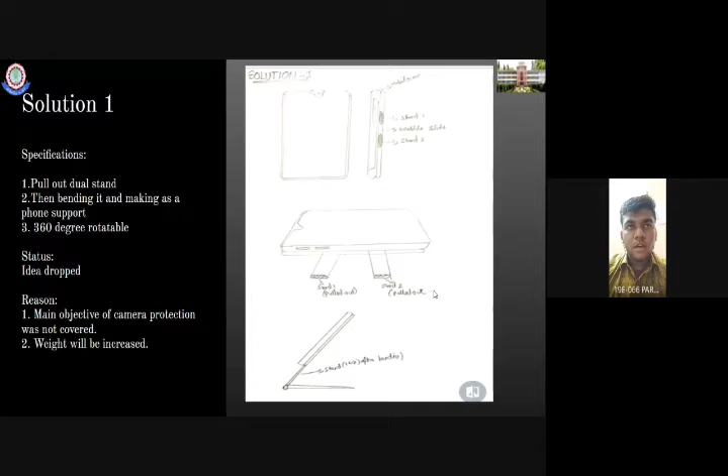The reason is the main objective of the project is to protect the camera, but that is not covered in this solution, and also the weight of the case would increase. Hence we drop this possible solution and skip to the next.

Solution 2 contains an adjustable rigid stand. It also protects the camera by a slider type of shield, and it is a holdable case while taking pictures.

But the status of this idea is also dropped due to some other reasons. The reason is there is a patent for this type of sliding camera protector, so we can't proceed with this further. Also, the stand will not be rigid for the respective position.

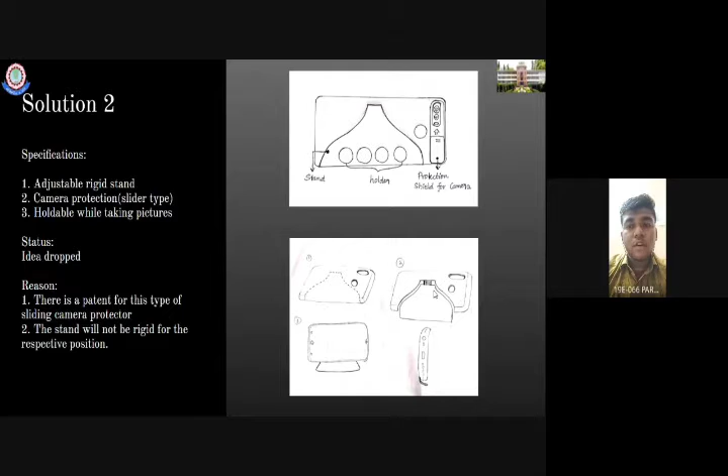You may see that in the image too, the stand is like that, so we can't believe the stand will hold for some other respective positions, and it will fail sometimes.

So we skip to possible solution 3, which contains an adjustable rigid stand, with camera protection achieved through the design. So protecting the camera is covered by overcoming it through the design, and the third feature is that it's holdable while taking pictures.

The status of this idea was taken, and it is the idea which we formulated into a prototype. The reason we took this idea is that heat issues can be overcome by this prototype, and the cost can be reduced compared to solution 1 and solution 2. The stand will be almost rigid, more than solution 2, for the respective position, and it is also adjustable. So we took solution 3 for our prototype design.

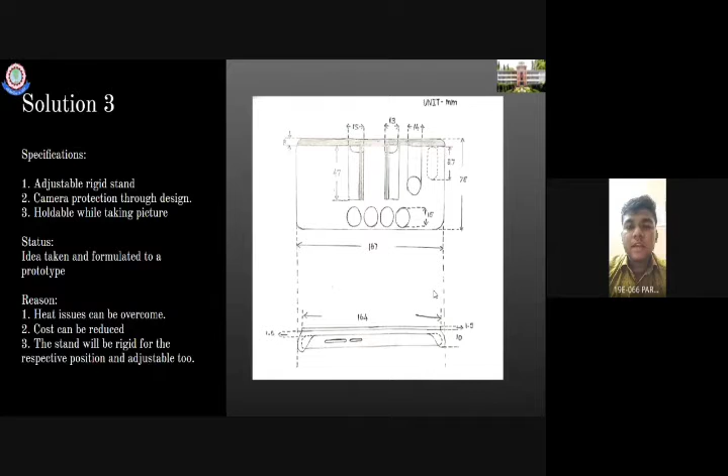Thank you, Parsuram. I am J. Manoj Kumar, 19E051. Here I am going to present the objectives of our prototype.

The figure beside is our prototype. This covers the following objectives of our project: camera protection, rigid stand, comfortable holder while taking pictures, solving heat issues, and dust and stain free. We will see one by one how these objectives are covered by our prototype in the upcoming slides. First, camera protection.

You can see that the camera is completely protected when the stand is in closed condition. Also, the camera is protected even when the stand is coming out, because the camera is slightly elevated from the stand if it falls unfortunately.

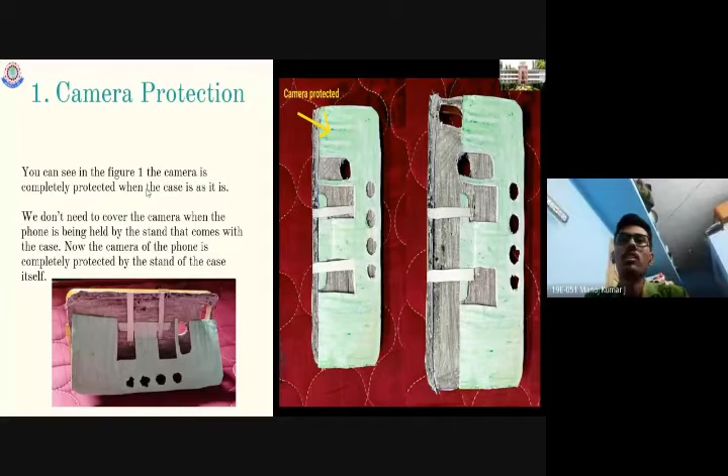Next is the rigid stand. That's a segment at the back of our case that protects the camera as well as acting as a stand. Since it is made from hard plastic, we can use it for a long time. There is an adjustable segment between the two strips, so we can adjust the stand as per our requirement, changing the angle of the phone.

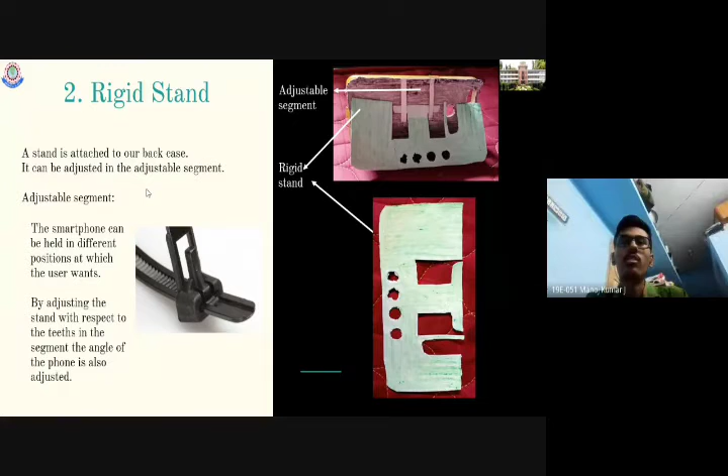Next, comfortable holder. There are 4 holes in our back case which help you hold the phone while taking photos, videos, or selfies.

Next, solving heat issues and dust and stain free. Here we use a layer of silk between the foam and the silicone case so that the silk absorbs the heat, so we can't feel the heat in our hand. Also, the stain in the case is due to the heating effect of the foam. The silk is in between the foam and the silicone case, therefore there is no color change in the silicone case, so our prototype is dust and stain free.

Next, Manoj Kumar will present.

I am Manoj Kumar, my register number is 19E052, and I am going to present our stakeholders' profile. Our stakeholders' names are K. Nirai Pandi, Prabhu S., Surya Kumar V., and their professions and mobile number and address details are mentioned in the slide.

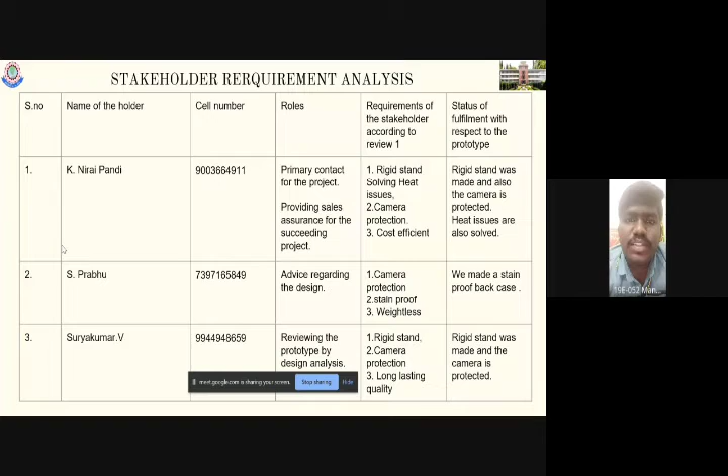We discussed with our stakeholders on the existing products and took their feedback. The existing products discussed with the stakeholders are bumper cases, silicon cases, hard cases, and flip cover cases without stand. Note that one of our stakeholders is a mobile shop owner.

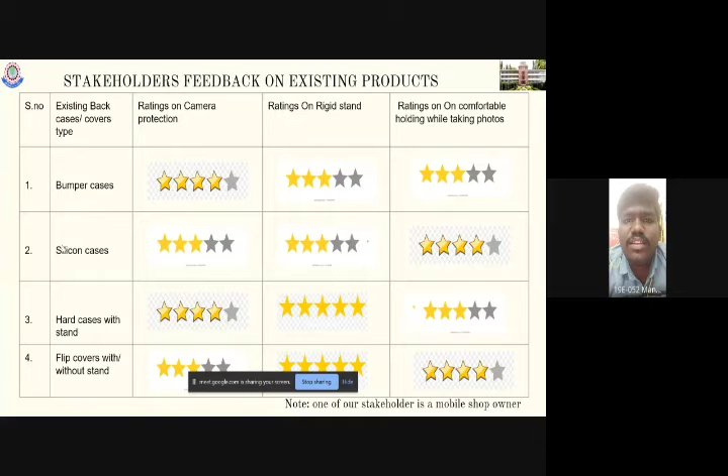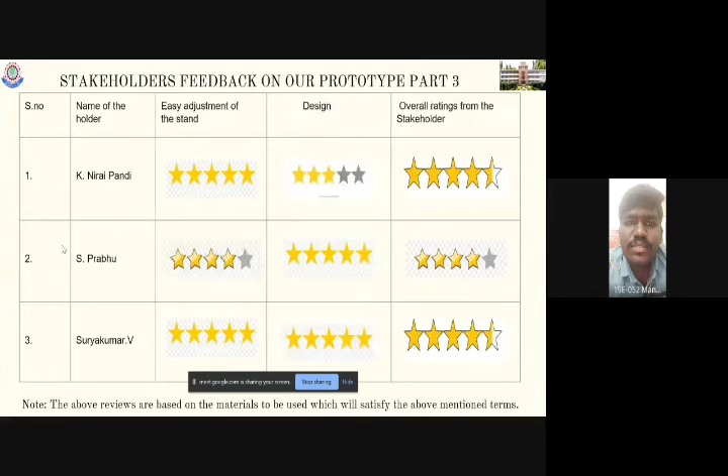The conversation audio with our stakeholders is attached with this slide, and you can check it with the link attached to the slide. The upcoming slides are presented by my teammate.

I'm Vasanthakumar, and my register number is 19E124. Now I am going to explain about the materials that we used in our project, and what analysis we went through to make the prototype.

The first material that we are using is a piece of silk attached to the front of that black portion. We use silk because it can withstand some heat, which prevents our hand from the heat generated by the phone.

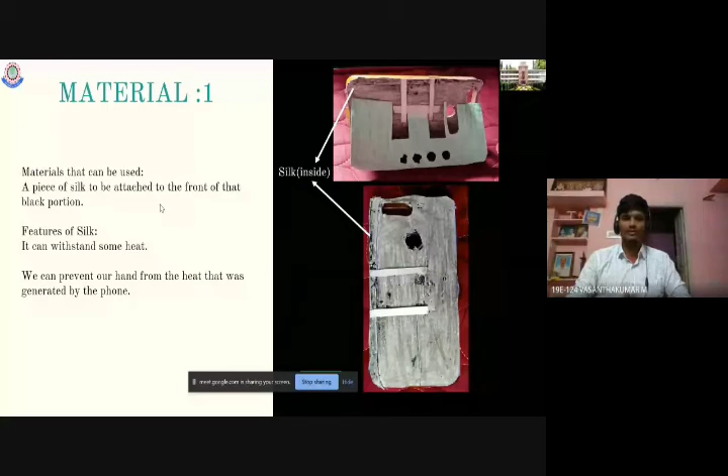Material two that we are using is hard plastic. We use hard plastic to make a rigid stand, and the features of this hard plastic are strong for its weight, electrically and thermally insulative, long-lasting, cost efficient, and resistive to shock, corrosion, and air.

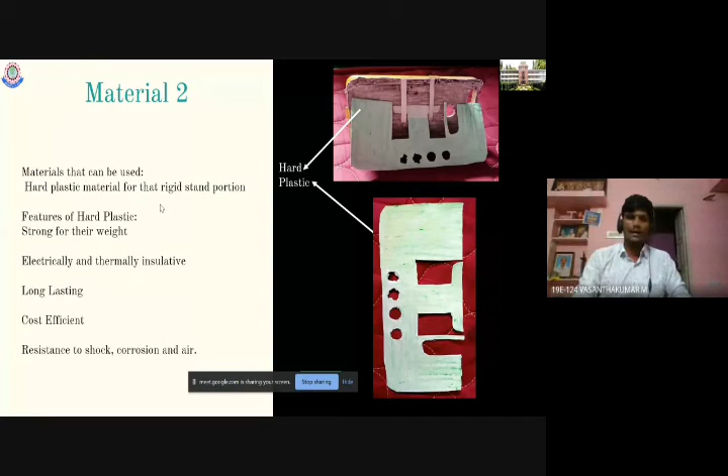These two materials combinedly form the back part of the case. The hard plastic part is attached to the back case with a silk piece which holds the rigid plastic stand in place with the back case. Thus, a rigid stand is made to the back case, and these are the dimensions for our back case.

We have designed only for one mobile model so far, which is the Realme U1, and we will make a back case for other models also in the upcoming weeks.

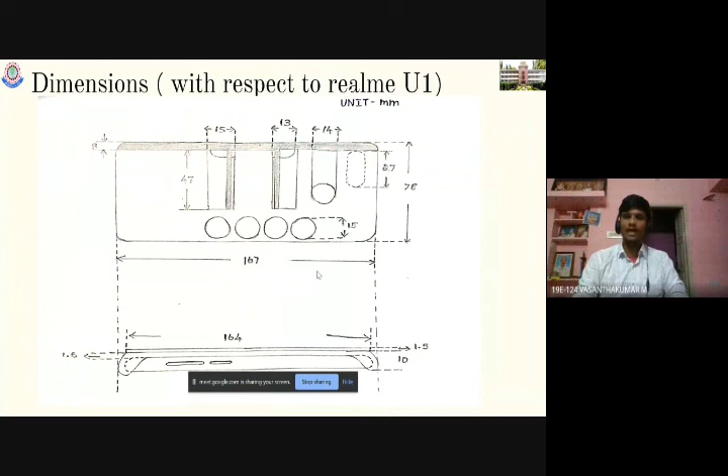After all these activities, in the upcoming week we will start the necessary activities for the next review. Thank you for giving us this wonderful opportunity.